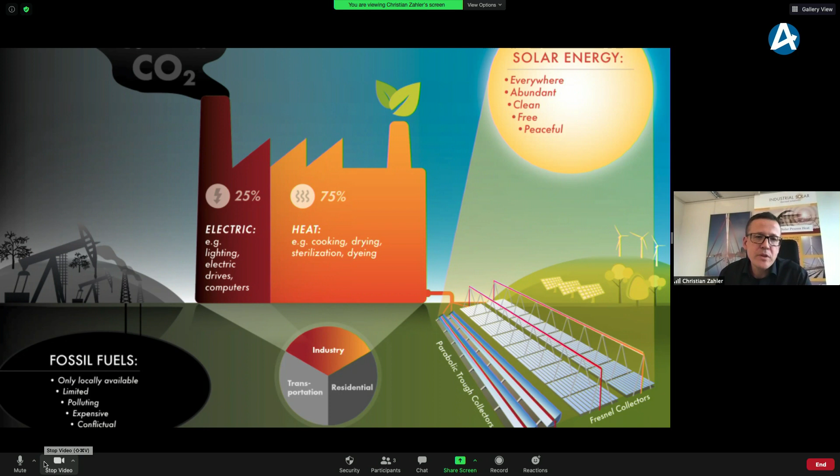Where do we come from? The story behind is that industry is responsible for about 1/3 of global energy demand. Surprisingly, approximately 75% is needed in the form of thermal energy, and only 25% in the form of electric energy. Nowadays, when we talk about renewable energy, everybody thinks immediately of electricity. But heat is very important and is responsible for a huge fraction, and also huge emissions. So far, heat in industry is generated with fossil fuels, and we want to help industry move into the next era and use renewable solar energy for their process heat demand.

Here is a more detailed analysis of this process heat demand. About 1/3 is required by industry: 74% heat, 26% electricity. 45% is covered with coal, 30% with natural gas, 15% with oil, and then a few renewables. Also interesting is the differentiation by temperature: about 30% is required in the low temperature range up to 150 degrees, about 22% in the medium temperature range up to 400 degrees, and the rest, almost half, is high temperature heat demand, like for metal and glass production or processing. With our technologies, we address the low and medium temperature range, roughly 50% of the total.

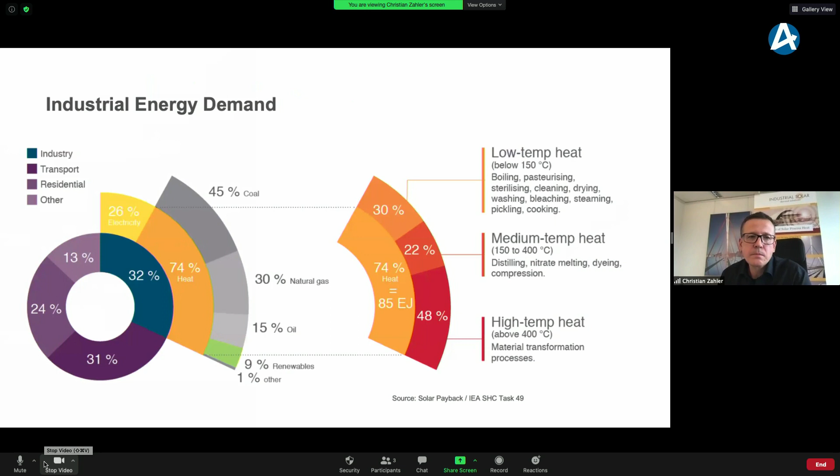Industry is going to grow, according to predictions, but not in Europe - not in Germany, not in Sweden. It's going to grow in emerging markets like Africa, India, other parts of Asia, or Latin America, which are typically sunnier than Central Europe. This is an excellent basis for our business model and our technologies.

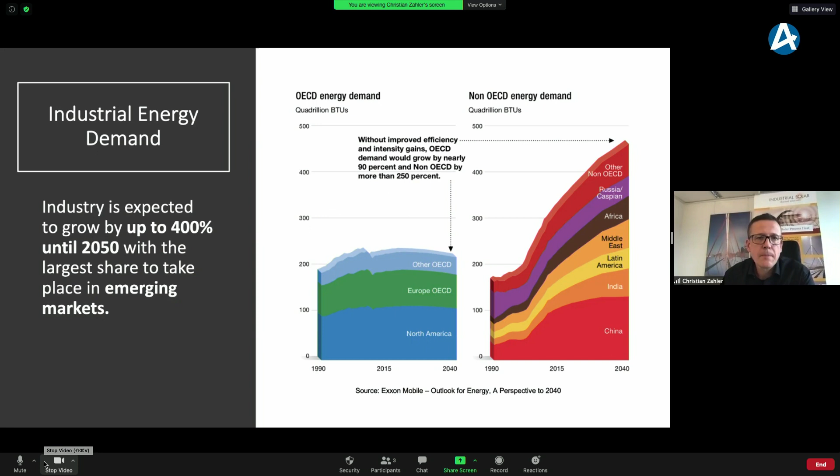A few words about our flagship technology: our in-house Fresnel Collector, the LF11 Fresnel, is designed to meet the power demand of industry. It's big enough to generate megawatts, yet small enough to be installed on flat rooftops of industrial buildings. It can generate temperatures up to 400 degrees C, and can be operated with different heat transfer fluids - thermal oil, liquid water under pressure, or generate steam directly.

Here you see how it works. We have a field of primary mirrors, uniaxially tracked, that focus sunlight onto a secondary mirror and absorber tube, where the radiation is converted to heat and then taken to the application in the factory. In this modular design, we connect strings of up to 24 modules, which is about 100 meters.

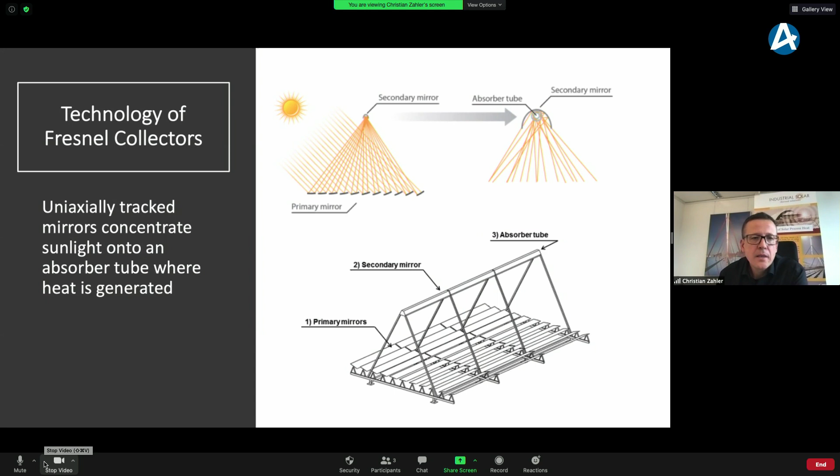Here is one example: a system installed in Jordan at JTI. It's a collector field with 1,254 square meters, generating steam up to 225 degrees C, with a thermal power of more than 700 kilowatts. We have also installed an absorption chiller, which partly converts the heat to cold.

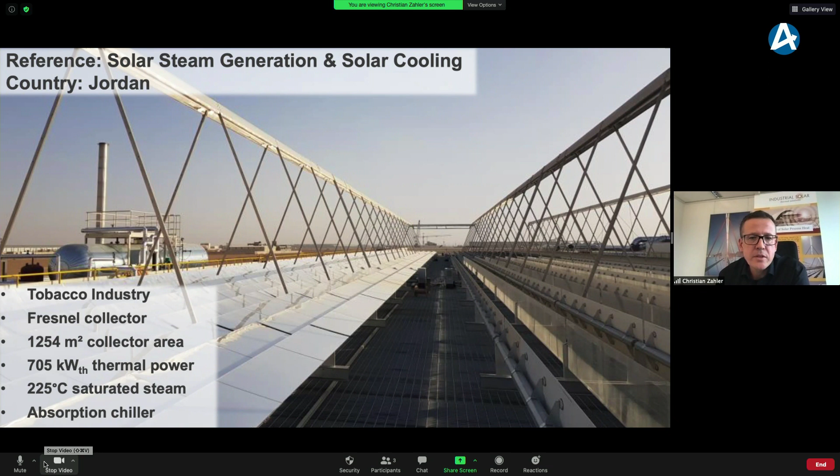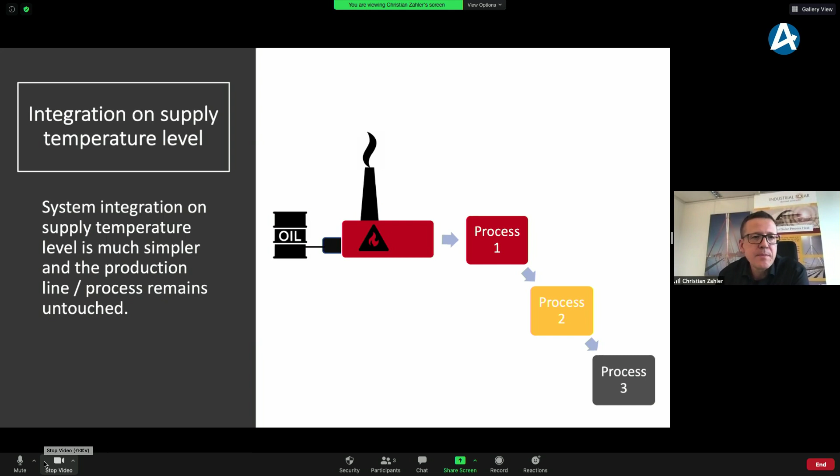One very important argument for this technology is that we integrate at supply level. We are not tackling the process itself, but directly connecting to the heat source of the customer, which is the fossil-fired boiler. This makes integration much easier and simpler.

Here you see some results of a life cycle analysis recently made by the Paul Scherrer Institute in Switzerland. It was very interesting to work with these scientists, and it came out that our Fresnel Collector is extremely environmentally friendly. You see here different impact categories, and the bright blue is the Fresnel Collector. The only exemption is the carcinogenic effects, which is due to the stainless steel we use, basically the production of chromium for stainless steel. We can significantly reduce this either by longer lifetime or by partly using black steel, which is then galvanized. But in all other categories, we were basically among the best or the very best.

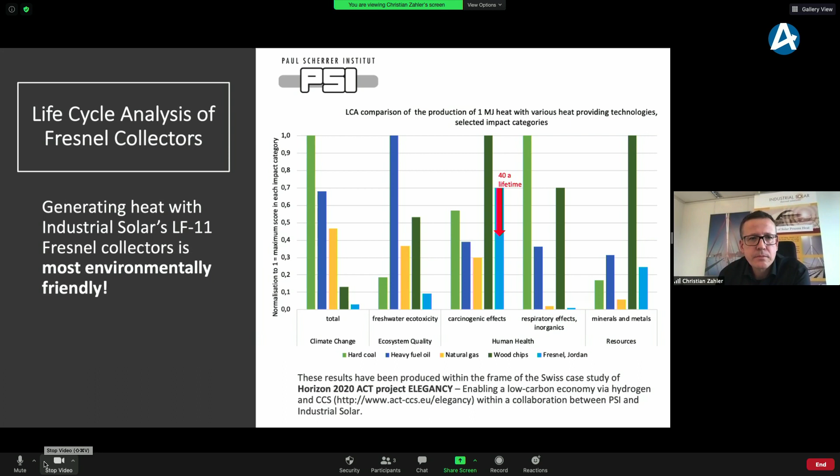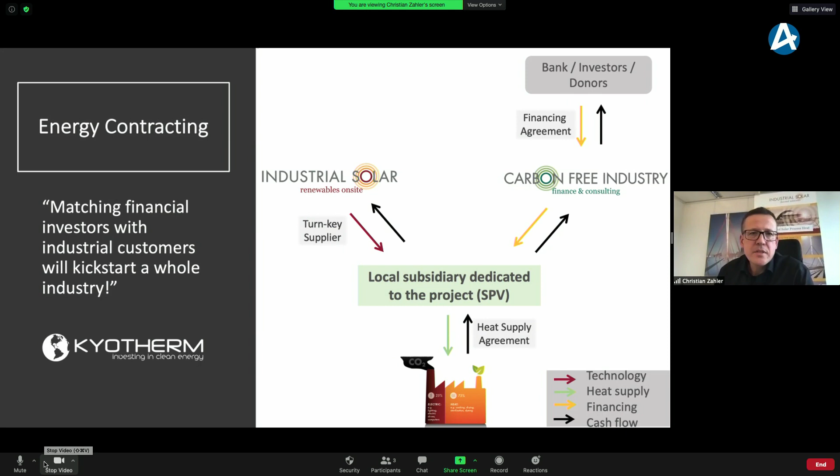Last but not least, some words about energy contracting. This is a major issue. Industry wants to reduce its emissions, but it doesn't have the liquidity to invest directly in renewable energy systems. There is a lot of capital on the market that has to be invested in green technologies, and by matching financial investors with our industrial customers, we can kickstart a whole industry. We have recently signed an agreement with Kyotherm, which is one of the investors and financial partners in this area. So much about Industrial Solar GmbH.

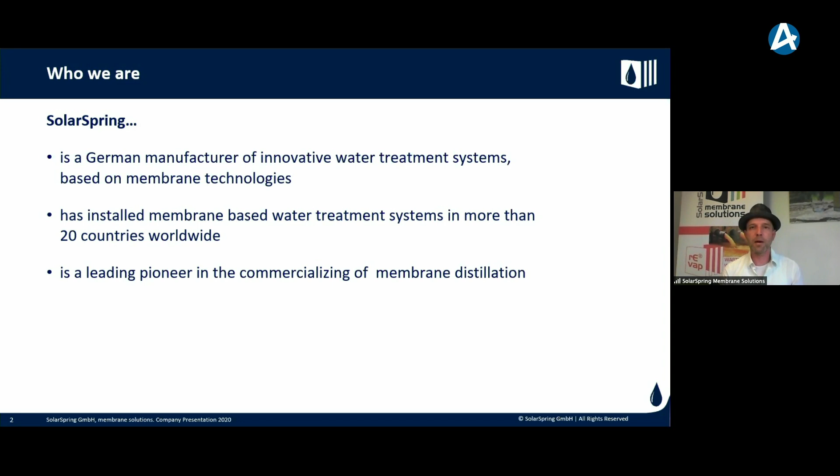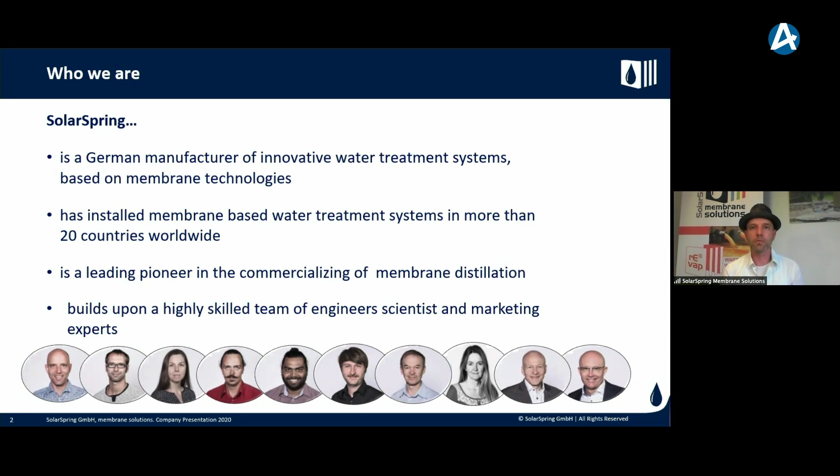We are a German manufacturer of membrane systems for all different kinds of water treatment systems. We already have installed our units in over 20 countries worldwide, and we are definitely a pioneer in commercializing membrane distillation. To do that, we have a brilliant, highly skilled team of engineers and scientists, and of course also marketing experts who work on that topic. The technology we use to treat water is membrane distillation. It's not very well known at the moment because there are only 3 companies worldwide who can actually build such modules, and SolarSpring is one of them.

But it's a pretty simple technology when you explain it and don't go into too much detail. What we use is a membrane, you see in the middle, where vapor goes through, and every one of you probably has such a membrane at home in their outdoor jacket, like from Gore-Tex for example. That's exactly what we use. With that membrane, we can separate pure water from really, really dirty industrial streams. And what is the nice side of those modules? They don't have pressure inside, so it's a pressureless system. They are not noisy at all, so it's really easy to implement in industry, and they have low maintenance intervals because they are really simple technology. They are specially made for high salts because they're only made out of polymers, so there are no metals at all, so no corrosion can happen. They are specially made for acids because they are made of polymers, and because we can recover valuable resources with such modules and that technology, we can save money.

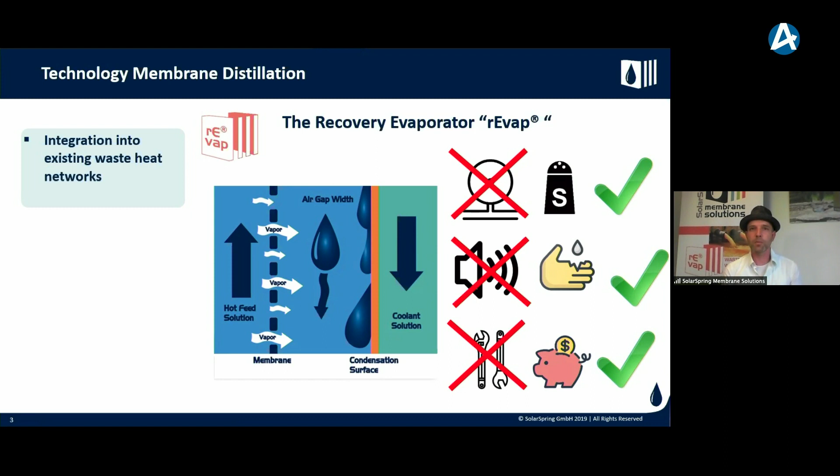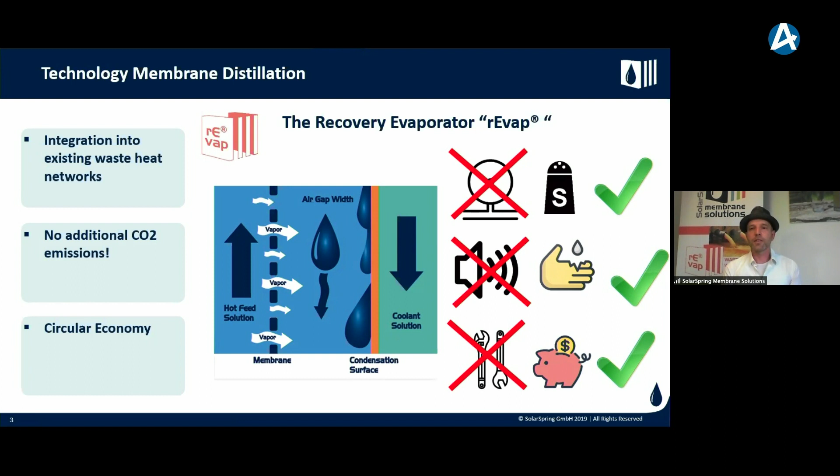The integration into existing waste heat networks in companies, or with renewable energies, is pretty simple because it's a dynamic system, so we don't need steady operation. We can adjust to the heat which is available on site. So there are no additional CO2 emissions, and we can help with that circular economy, to close loops basically.

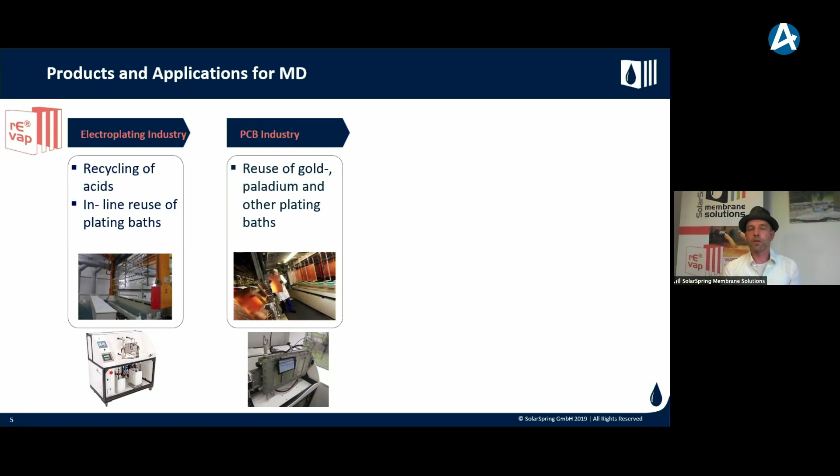The applications at the moment are a wide range, but what we are focusing on at the moment is the electroplating industry. We can recycle acids in the galvanic industry, for example, or where metals are plated, the surfaces are plated. We are in the PCB industry, so we have a case at the moment where we reuse gold, palladium, and other valuable metals.

The zero liquid discharge industry is always a big name, but basically it just means no liquids are coming out of the industry at the very end, and membrane distillation will play a big role there. The last market we are in is food and beverage, where we can gently concentrate any kind of liquid used in that industry.

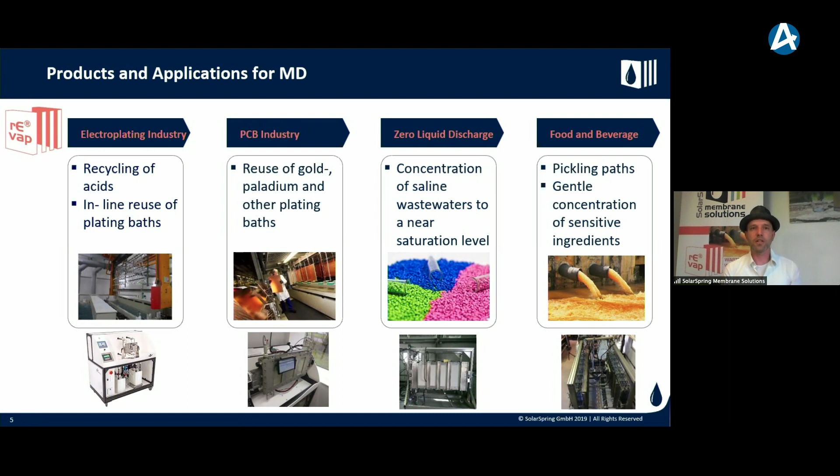The references for MD are also many. For example, AT&S, an Austrian company which is one of the biggest in Europe, produces printed boards for computers and all different kinds of electronic devices. We have a unit running there since 1.5 years.

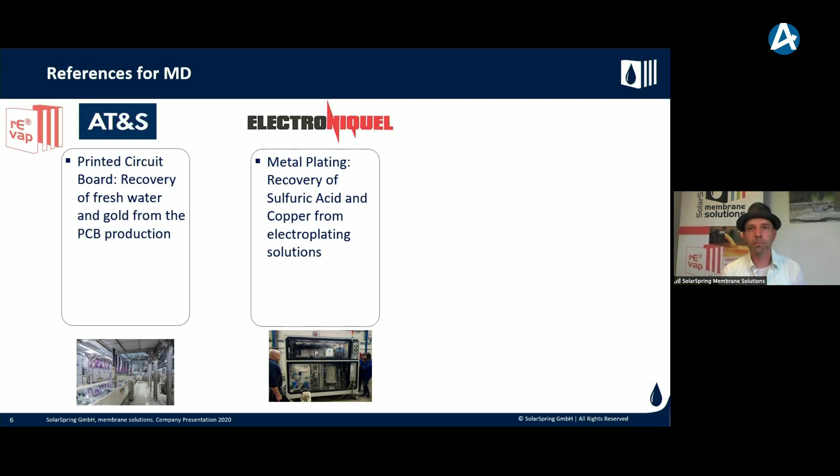Electroniquel, a Spanish company, does metal plating. We have a unit there used for recovery of sulfuric acid, which is used all over the world when it comes to treating plates. At Deutsche Edelstahlwerke, they produce stainless steel, and we do recovery of mixed acid. For all those applications, only membrane distillation with polymer modules really works.

The other technology SolarSpring provides is ultrafiltration. We use that technology for drinking water purposes. We have units from really small to big, all different kinds, and it's a solar powered compact system.

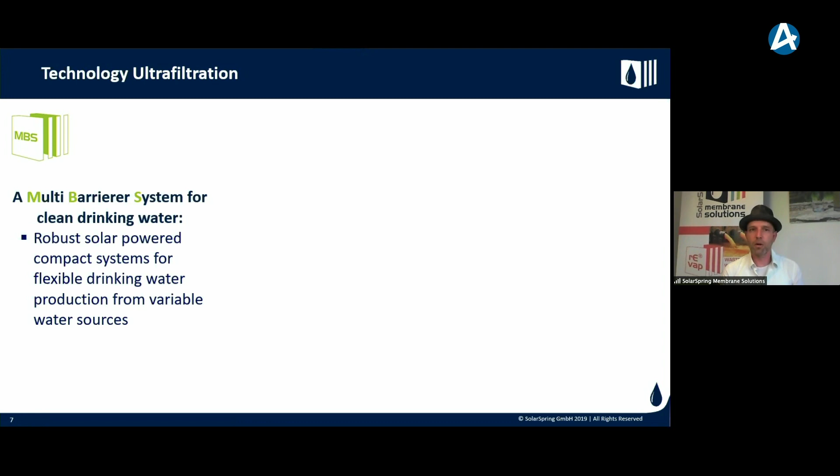We call it a multi-MBS, a multi-barrier system, because we use up to 5 stages for cleaning any kind of dirty water. So the customer ends up with clean water, and it's also equipped with a monitoring system that can send an SMS or email telling you to clean it or change modules. It was specially built and constructed for India, which is a really harsh market and conditions.

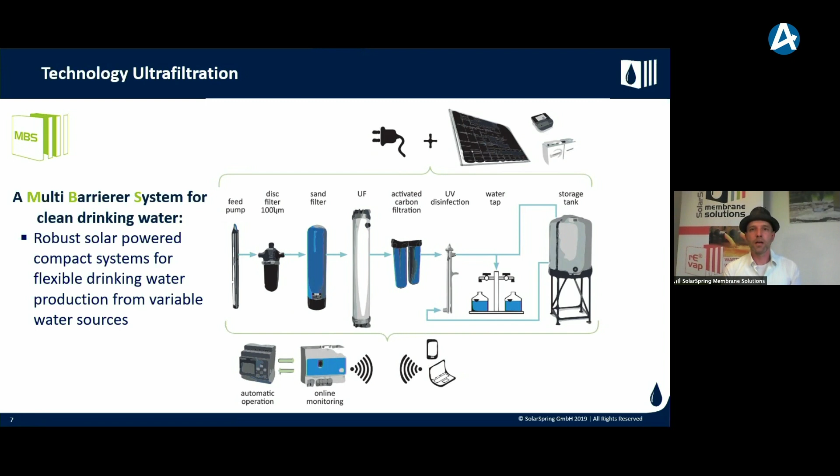We have a lot of systems installed all over the world running on that technology. Here you see the range. It starts with mobile systems, which can be used for camper events or small houses, doing up to 5,000 liters per day.

It comes with a solar field - you just put it out in the sun and then you have clean drinking water. The economic systems do up to 21,000 liters per day, more for big houses and small villages. And then we have the complete system, which does up to 100,000 liters per day.

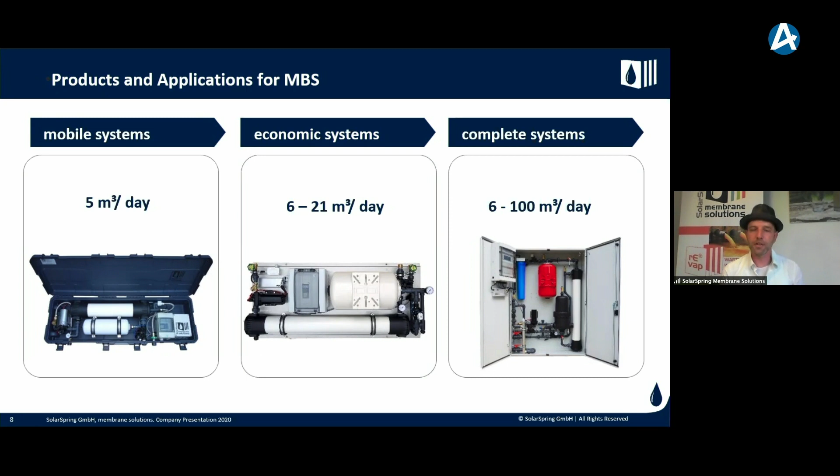All those systems use the same technology and can run on solar, but of course can also be connected to the grid.

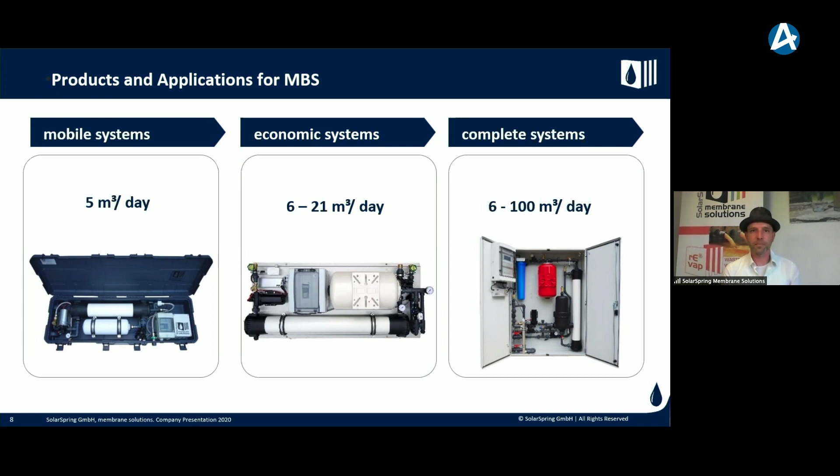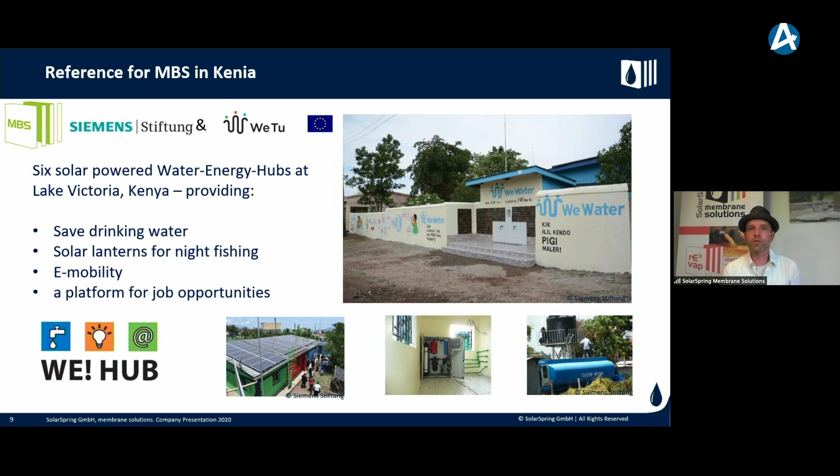References for those units include a really nice project we did together with the Siemens Stiftung in Kenya. There they got permission to get water from Lake Victoria, and they are providing up to 6 hubs where they sell water to the people and also use solar power to charge mobile phones or other batteries.

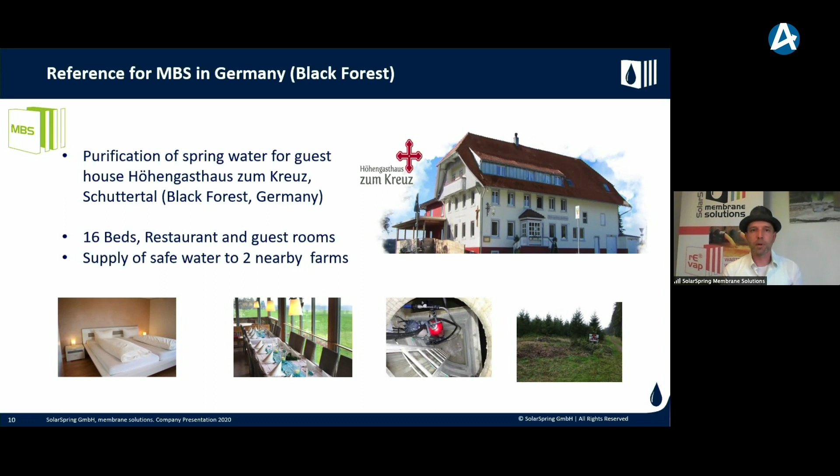In the Black Forest, we have some applications where we clean water which is actually all right, but still has some bacteria in it, so you basically can't drink it. We installed a couple of units where we supply restaurants, guest rooms, and farms.

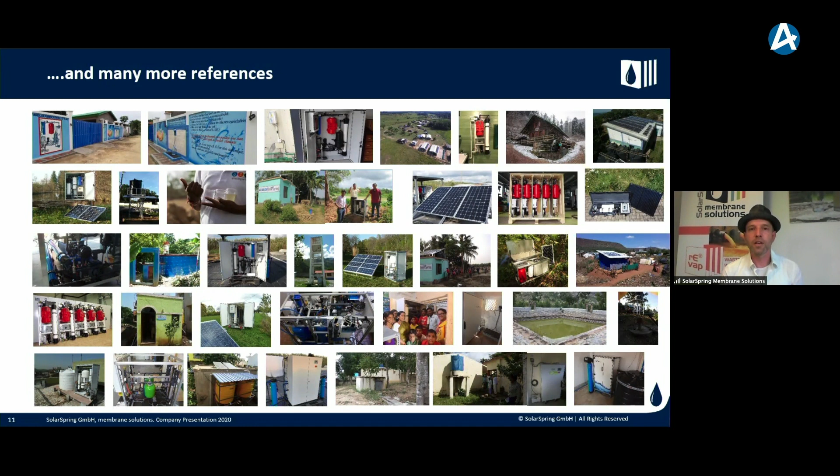There are many more references all over the world. That ultrafiltration technology is sold through resellers all over the world, and we do some installations ourselves in Germany, but it's mainly a product that goes through the resellers.

The synergies between Industrial Solar and SolarSpring are pretty simple: they produce heat, and we need heat to supply our membrane distillation system. Almost 80% of industry needs process heat and process water, so that's where we come together, and where we also have huge potential for marketing strategies.

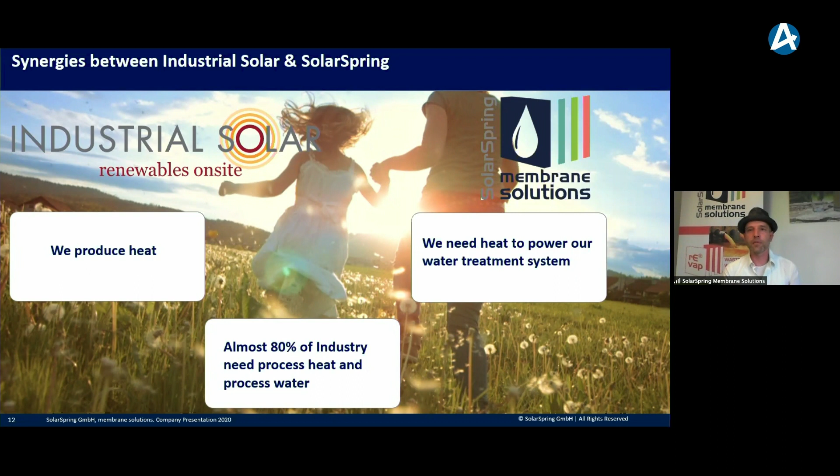So that's actually from my side. I see I was actually too fast - I have 3 minutes left. So maybe Christian wants to add something.

Yeah, we were both really fast. I was trying to hurry up to give you more time, and now we have a couple of minutes left. Maybe I can comment a little bit on this strategy that we now follow.

Industrial Solar acquired SolarSpring to make exact use of that mentioned synergy.

It was very interesting to learn that about 80% of industry that needs heat for its production also uses water, and that's easily understood when you think of different industries like the food industry. They are boiling vegetables and then deep freezing them for convenience food. Beverage industry too - plenty of industries out there who need clean water and clean energy for the future. This is exactly what humankind needs to survive: clean energy, clean water, and industry as well.

And I hope that we can make use of the many contacts to multinationals that we have. If we are not able to sell them a process heat system yet, then we might be able to sell them a water treatment system. We are on the way to becoming a one-stop shop for industry that wants to be clean and green.